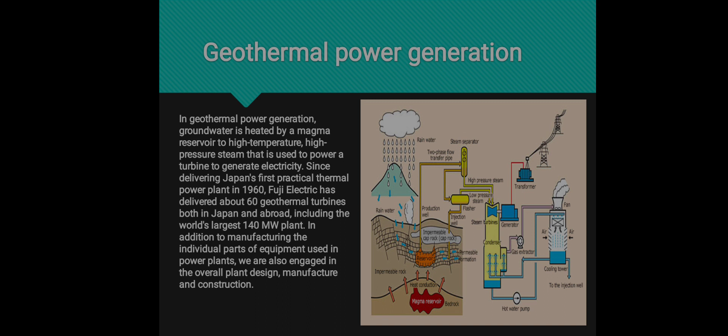Advantages of geothermal power generation. First one is environmentally friendly. Geothermal energy is more environmentally friendly than conventional fuel sources such as coal and other fossil fuels. In addition, the carbon footprint of a geothermal power plant is low. While there is some pollution associated with geothermal energy, this is relatively minimal when compared to fossil fuels.

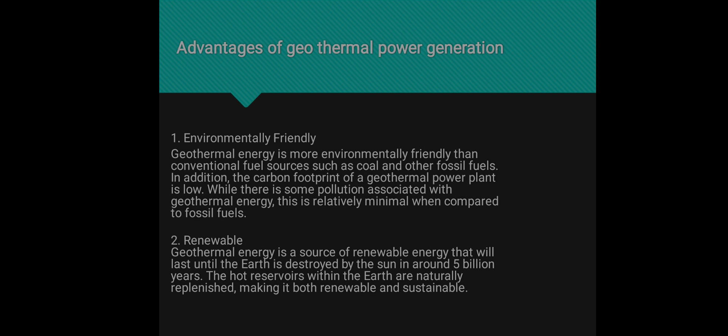Second one is renewable. Geothermal energy is a source of renewable energy that will last until the earth is destroyed by the sun in around 5 billion years. The hot reservoirs within the earth are naturally replenished, making it both renewable and sustainable.

Third one is huge potential. Worldwide energy consumption is currently around 15 terawatts, which is far from the total potential energy available from geothermal sources. While we can't currently use most reservoirs, there is hope that the number of exploitable geothermal resources will be increased with ongoing research and development in the industry.

Fourth is sustainable and stable. Geothermal provides a reliable source of energy as compared to other renewable resources such as wind and solar power. This is because the resource is always available to be tapped into, unlike with wind or solar energy.

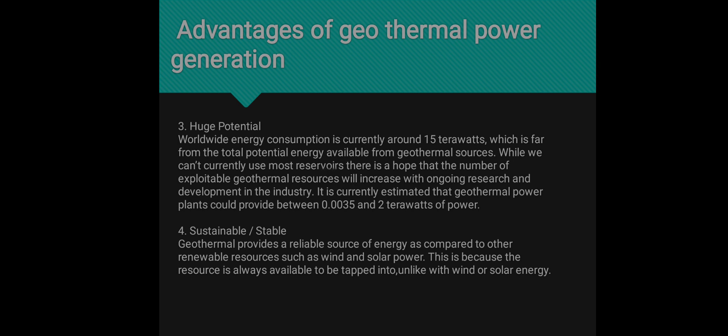Sixth one is reliable. Energy generated from this source is easy to calculate since it does not fluctuate in the same way as other energy resources such as solar and wind. This means we can predict the power output from a geothermal plant with a high degree of accuracy.

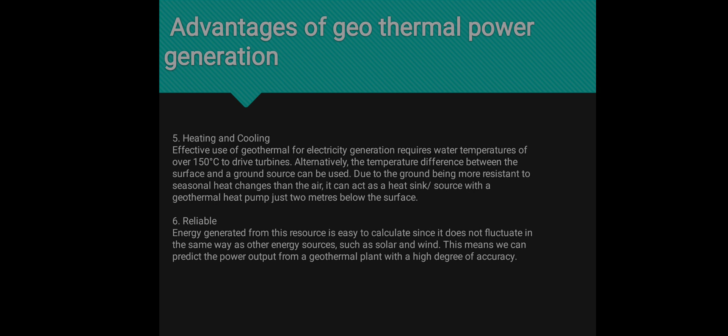No fuel required. Since geothermal energy is a naturally occurring resource, there is no fuel required, unlike fossil fuels that are finite resources which need mining or otherwise extracting from the earth.

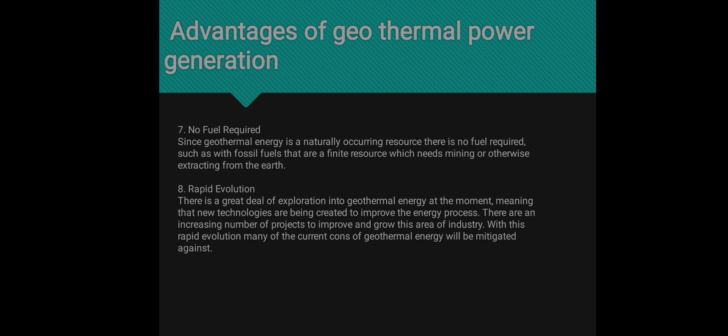Disadvantages of geothermal power generation. Location restricted. The largest single disadvantage of geothermal energy is that it is location specific. Geothermal power plants need to be built in places where the energy is accessible, which means that some areas are not able to exploit this resource. Of course, this is not a problem if you live in a place where geothermal energy is readily accessible, such as Iceland.

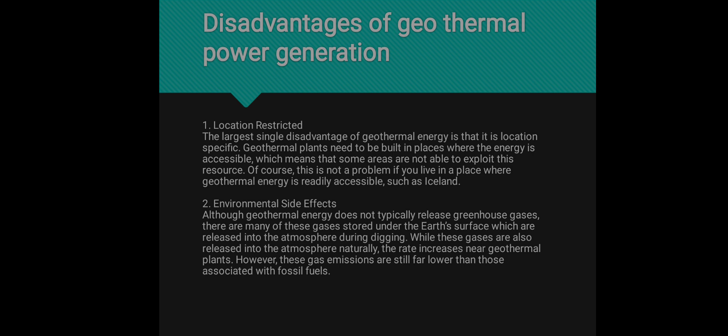Environmental side effects. Although geothermal energy does not typically release greenhouse gases, there are many of these gases stored under the earth's surface which are released into the atmosphere during digging. Earthquakes. Geothermal energy also runs the risk of triggering earthquakes. This is due to alterations in the earth's structure as a result of digging. This is a problem more prevalent with enhanced geothermal power plants.

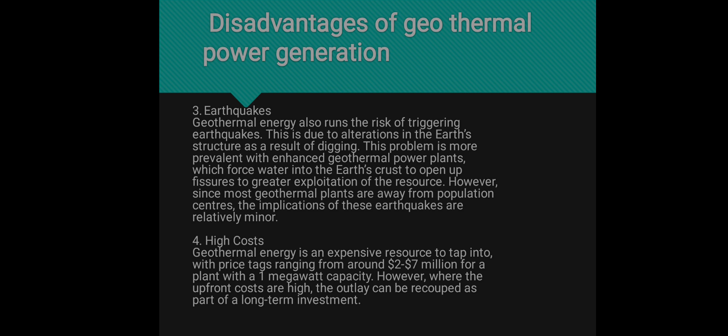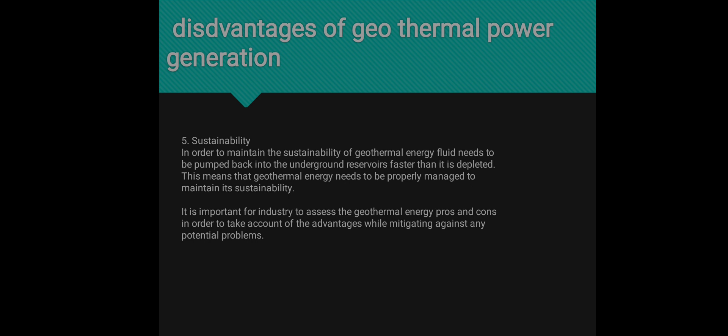Fourth one is high cost. Geothermal energy is an expensive resource to tap into, with price tags ranging from around $2 to $7 million for a plant with a 1 megawatt capacity. Sustainability. In order to maintain sustainability, geothermal fluid needs to be pumped back into the underground reservoirs faster than it is depleted. It is important for industry to assess the geothermal energy pros and cons in order to make use of the advantages while mitigating against any potential problems.

Applications of geothermal power generation: space heating and cooling, generation of electric power, industrial process heat. Other applications include desalination of water, heavy water production, extraction of minerals from geothermal fluids, timber seasoning, etc. However, geothermal energy is presently utilized mainly for power generation and space heating purposes only.

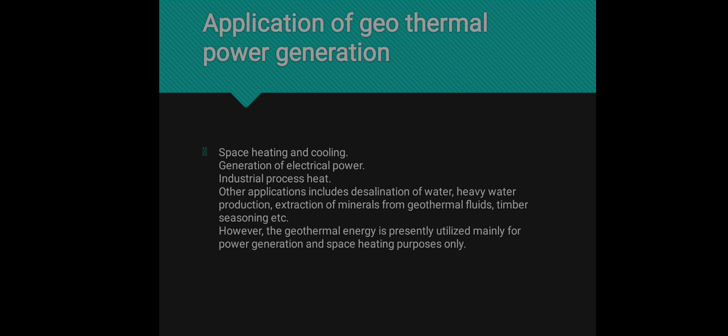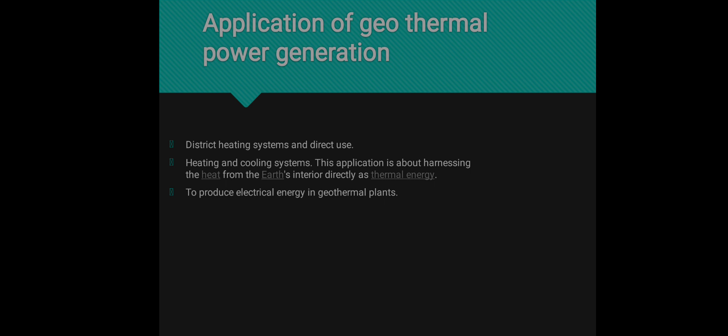District heating systems and direct use. Heating and cooling systems. This application is about using the heat from the earth's interior directly as thermal energy to produce electrical energy in geothermal plants.